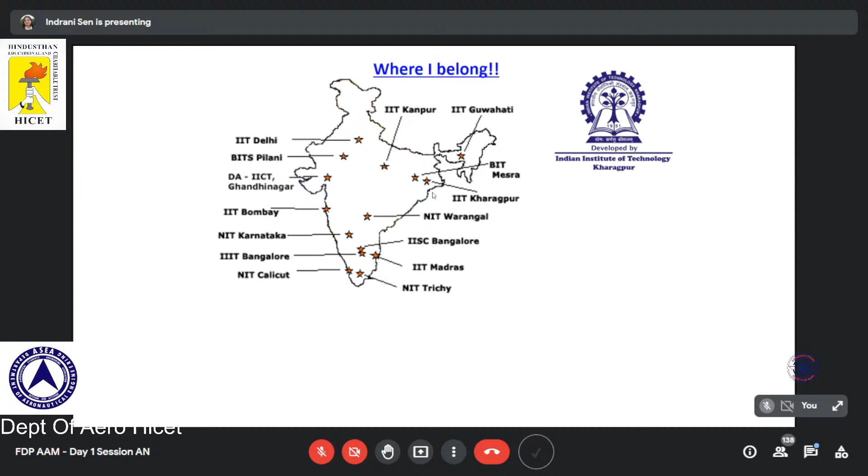So the title is a little bit more than just the shape memory alloy. It is microstructure and property correlation of nickel titanium based shape memory alloy. Before I start, let me give a brief overview of where I come from. This place is in the eastern part of this country, and this is the first ever IIT made in our country, established in 1951 by the first Prime Minister of India, Pandit Jawaharlal Nehru. We still have the old building here.

This is the old building with IIT inscribed on it, and this is actually in the land of Hijli, where we had the Hijli detention camp for the freedom fighters. There are jails inside the campus, and this jail as well as this building itself is now a part of the museum. We take great pride in converting a land of such great personalities into a land of knowledge. This is our present building. Many of you might have seen or visited this. This is the main academic building of our institute.

And this is my group, very recently taken, where one of my students has graduated, and he is joining as an assistant professor at IIT BHU today itself. This is my group logo. We mostly work on microstructure and mechanical properties, so broadly it can be termed a microstructure mechanical property correlations group, and we work on both conventionally processed as well as additively manufactured materials. And we do the studies at all length scales.

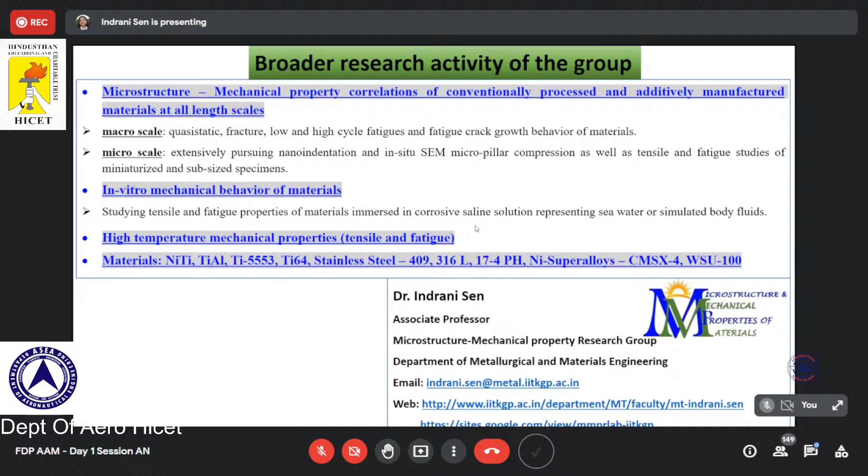At the macro scale, we study quasi-static tensile, compression, fracture, and all different kinds of fatigue behavior of materials. At the micro and nano scale, we do nanoindentation very extensively and some small scale mechanical testing also. Since we work on shape memory alloy, and one of the niche application areas of this material is as a biomaterial, we also study the in vitro mechanical behavior of this and other materials. We study the tensile and fatigue properties while the specimen is immersed in a human body-like environment.

This is also important when we are talking about marine applications. So we need to figure out what would be the performance when it is in a saline atmosphere. We also try to find out the high temperature properties, tensile and fatigue properties, and this is particularly relevant for titanium-based alloys which are used for aerospace application.

We do work on different kinds of material. Major work is going on nickel titanium. Other than that, we also have research activities focusing on different categories of titanium alloys. And then, of course, stainless steel forms the main backbone of metallurgy. So we also do work on several grades of stainless steel, both conventionally processed and additively manufactured, as well as different categories of nickel-based superalloy.

So in today's presentation, we will be focusing mostly on the mechanical and functional behavior of nickel titanium-based shape memory alloy, particularly in the submicron scale. Okay, so with this basic overview of my group activities, let's move on to the material.

Now, this is a very fascinating material, and let me just start the presentation with this note that this is the first day of this FDP program, and you are attending this program from different places. You are going to listen to many of the talks, which I'm sure will be very informative and will be used in your area of research or academic activities. So you are going to remember the major takeaway from this program, right?

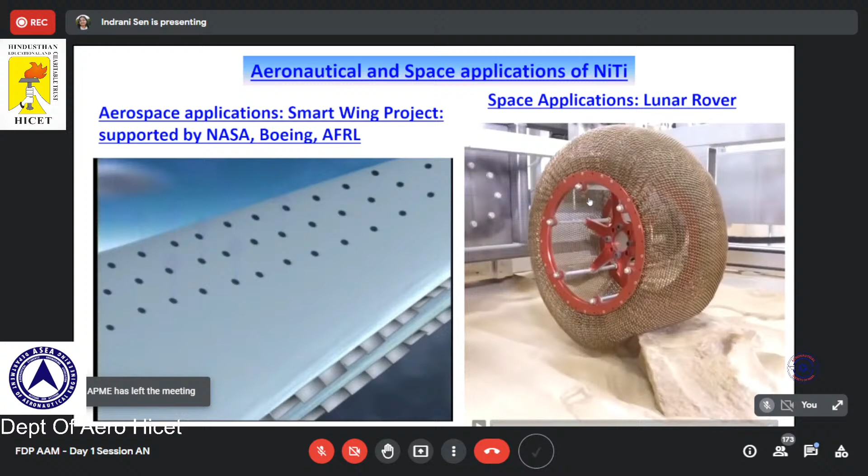Ma'am, can you just play the video? I guess the audio is still not coming. I can do one thing. I can unshare and then share one more time. Is that okay? No, it's not audible, ma'am. Yeah, it's not audible. So let me just unshare this and try to figure out if I can share the sound as well. I think instead of sharing a particular tab or window, if you share the entire screen, you will be able to play the audio.

Okay, now this one here on the right side is another very interesting application of nickel titanium. This is used in the lunar rover, the vehicle that is used on the moon. You know, the moon has a very rough terrain, and for that, again, NASA has made a wheel made of a mesh of nickel titanium. And you can see how it can overcome any hurdles that come in its way, and still there is no damage on the wheel frame.

So you can see that it can easily pass through different kinds of terrain. It is made of nickel titanium alloy, which can undergo a huge amount of deformation and yet come back to its original shape when it is removed from that rough terrain. So this is also known as super elastic. Earlier it used an aluminium wheel, and significant damage was noted in the wheels. It was made in the 1960s, and that could not hold much weight.

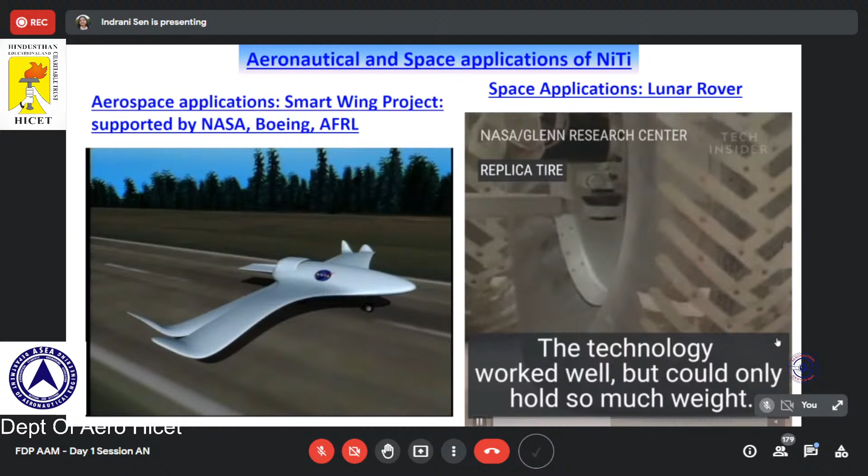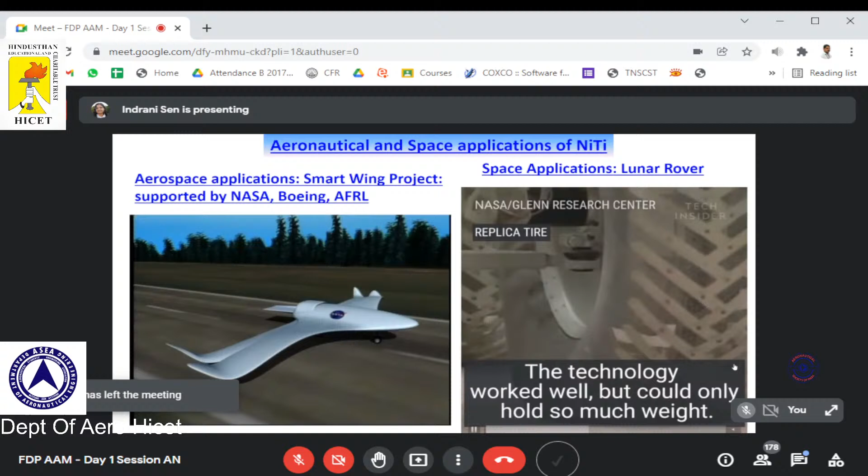So there was further development, and then it was used in the Curiosity Mars rover. But significant damage was incurred on those wheels. You can see the wheel structure there, completely different from the present one. So now this one is the latest design of the lunar rover wheel that has the ability to move smoothly on any kind of terrain, however rough it is. This will be used 2 years from now in the Mars mission. Okay, so various ambitious activities are going on.

So you have seen the extreme usage of nickel titanium for very niche and high-end applications. Now let's see where else this can be used. Not only nickel titanium, shape memory alloys and polymers are also very much used in the field of textiles. This is used not only in armor jackets, but several other kinds of cloth materials. And you can see this as an example.

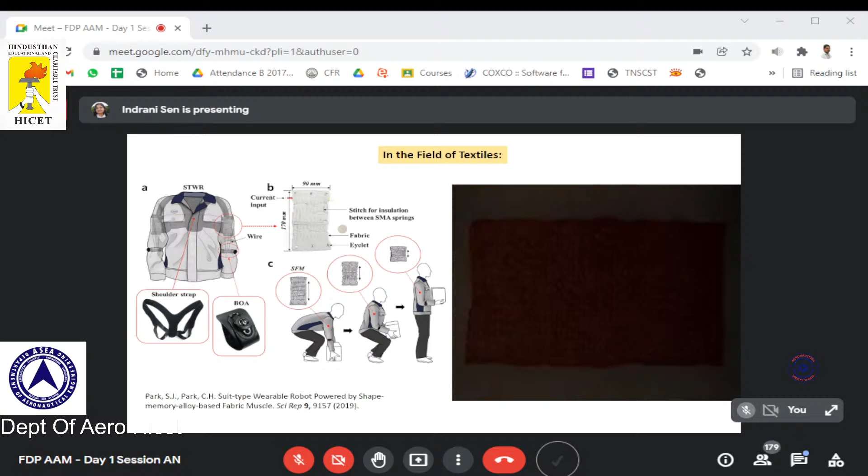This is a cloth made of a shape memory alloy fabric, and this can automatically squeeze or expand depending on the temperature. They can automatically roll up if the temperature is changed. So this is very fascinating and can be used in different kinds of applications. It looks like magic.

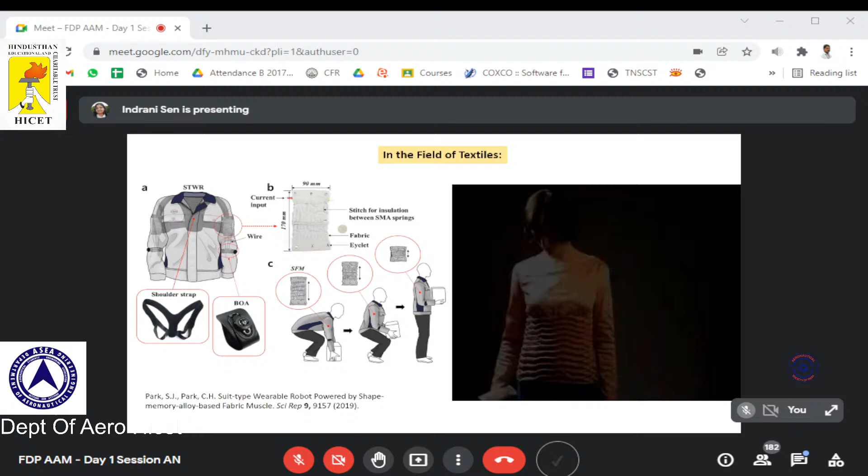Okay, so just by spraying the warm air, it is possible to squeeze the cloth. Okay, so then the obvious question that comes to anybody's mind is why, how, right? So how can this material remember its shape? And to answer this question, I should also emphasize something called phase transformation, which once again many of you will be aware of.

But for those who are not very familiar with phase transformation, this means how the crystal lattice is being changed. Okay, so initially this material is made of a structure which has some kind of lattice arrangement like this. In case of nickel titanium, the starting phase is called austenite, and this austenite phase has a cubic structure. You can see one of the atoms, let's say the nickel atom, is sitting at the body center, and the titanium atoms are sitting at the corners of the cube, and so on.

If we are reducing the temperature or applying stress, or both, then this crystal structure can change to a completely different one. Now this one is having a monoclinic structure. Same nickel atoms and titanium atoms, the red and the blue ones, are rearranged in a different kind of lattice, and this leads to all those magics that are coming into place. So the cubic structure can change to a monoclinic one, and that leads to all the differences in the properties.

So this video once again shows how nickel titanium, or shape memory alloy in general, works, and how the shape memory alloy structure can be formed. But unfortunately, if the sound is not audible, I will try to explain this as much as I can. Okay, this is not audible, right? So let me mute it.

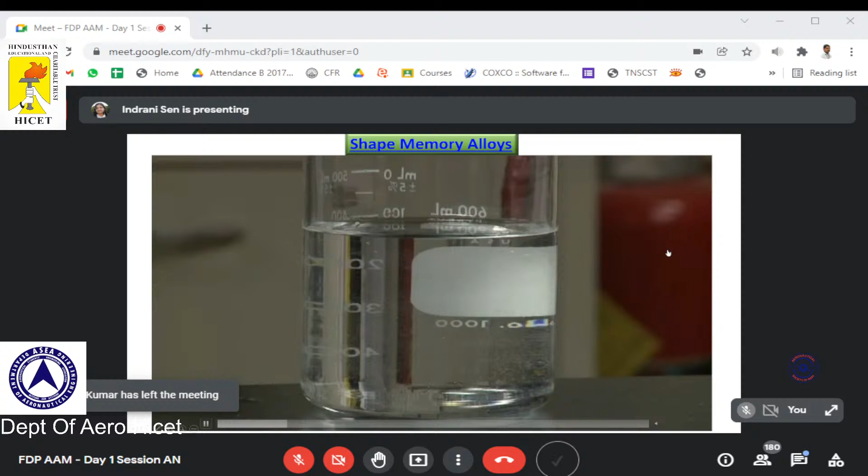So this is warm water, and whenever a wire is placed in that warm water, it gains its particular shape that has already been set to it. So you see, these are the different phases. This one is ice, and this is water, and then the boiling one, you know about the vapor. So these are the three different phases of water. So similarly, for nickel titanium also, as I have shown, there are two different phases, austenite and martensite. And all this is by the placement of the atoms into certain crystal structures.

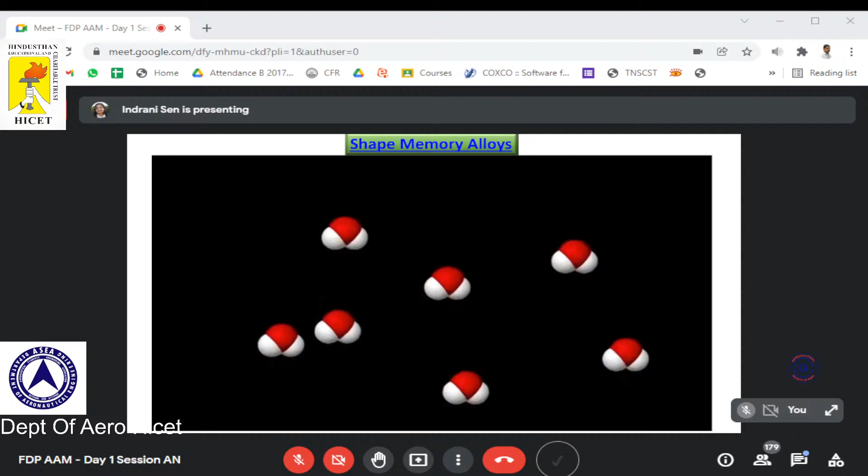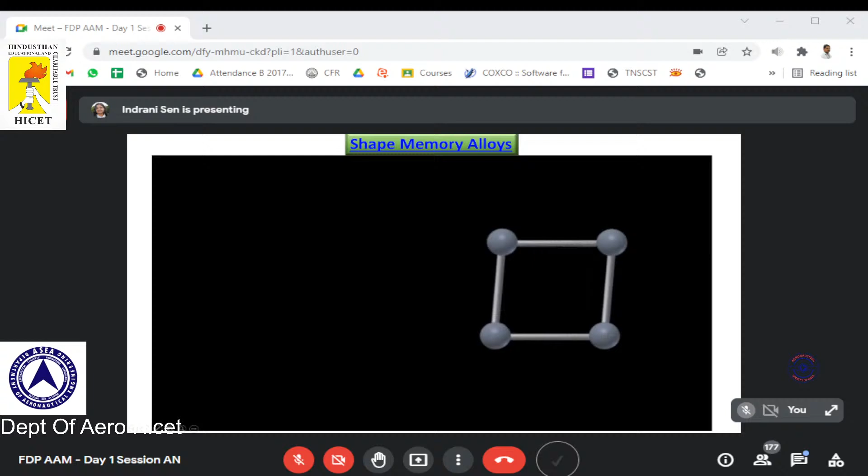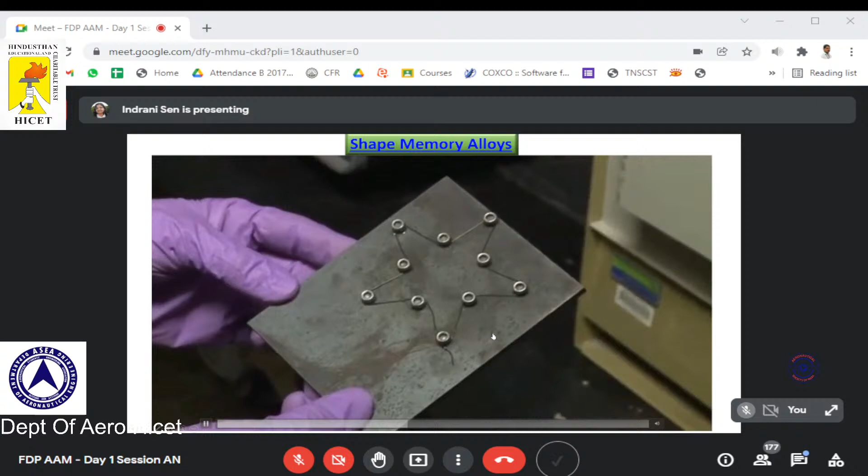So in case of ice, there is a hexagonal one at very low temperature. So in case of shape memory alloy, this low temperature phase is martensite, and at high temperature, it automatically changes to this cubic structure. And how to set the memory shape? You can see how the wire is being plugged into the screws. So a particular shape is being given, and then we need to heat it to a certain temperature at which it is fully austenite.

Okay, so at high temperature, this structure is having an austenite shape, and it is able to remember that shape. And when we are cooling it or quenching it in water, it changes to martensite phase. Now when it is at room temperature, if we are changing the shape, it is in the martensite, and whatever is happening to its lattice, it will come back to the austenite once it gains the temperature back. So as soon as we give it high temperature, the martensite structure has changed to austenite, and it has regained its shape. So different kinds of predetermined shapes can be obtained just by changing the temperature.

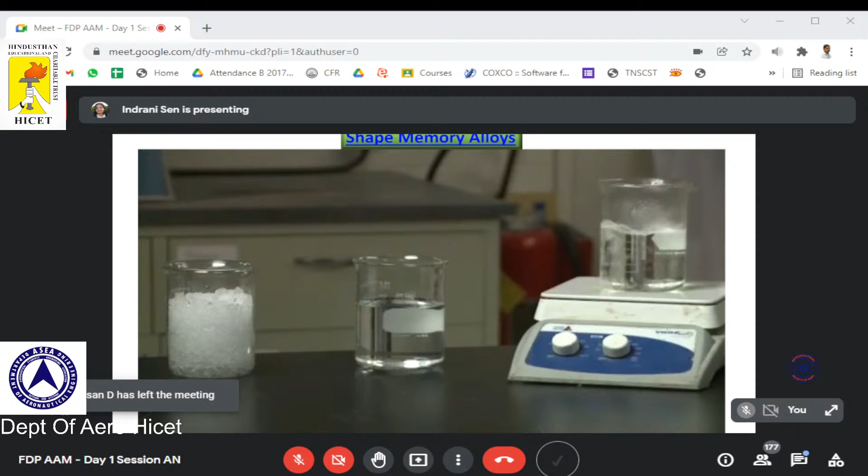This is how we would like to look into the more details of any kind of deformation or changes that are happening. We would like to look into the atomic changes that are responsible for such differences in the properties.

Now, shape memory alloy is not only showing such changes in shape, as you have seen when we put it in warm water and get a particularly pre-designed shape. It is not only restricted to that.

Rather, we can have a two-way shape memory effect, which means we can have two different shapes set in this material. In the austenite phase, we set one particular shape, and in the martensite phase we set another shape. Then just by changing the temperature or applying stress, it can go back and forth between the two different shapes.

So obviously this is used for several applications where we can make use of the two different shapes of this material.

You can see that this one is the cold one, this one is the hot one, and the spring has a particular length in the cold and the hot state, and it automatically goes to that kind of configuration whenever we are changing just the temperature.

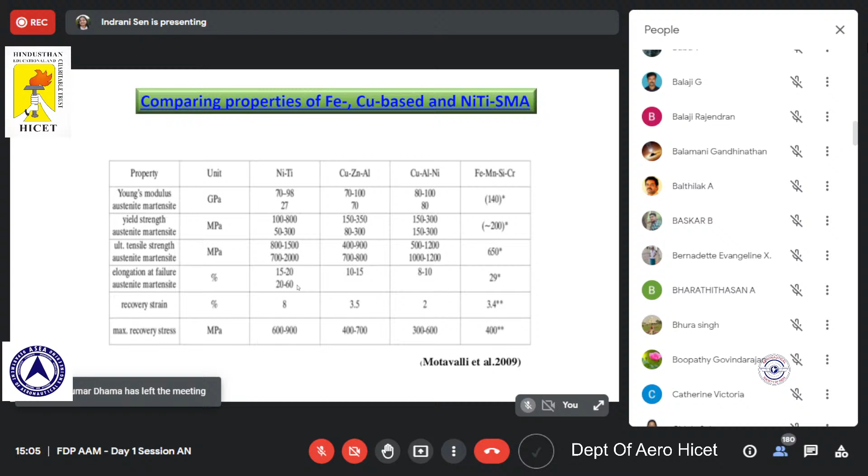Apart from that, strength and elongation are also quite high for nickel titanium, quite optimum values that we can obtain, and that is one of the reasons nickel titanium has gained popularity over other shape memory alloys.

If we talk about the temperature range over which it can be used, nickel titanium is typically used from around minus 50 degree to plus 100 degrees centigrade, quite a good span of temperature for regular usage.

If we want to use it at a higher temperature range, we can make a ternary nickel titanium alloy with the addition of hafnium, zirconium, or platinum, and achieve a temperature as high as 300. Overall, we can achieve a range starting from minus 50 to plus 300 or 350, quite a high range of temperature.

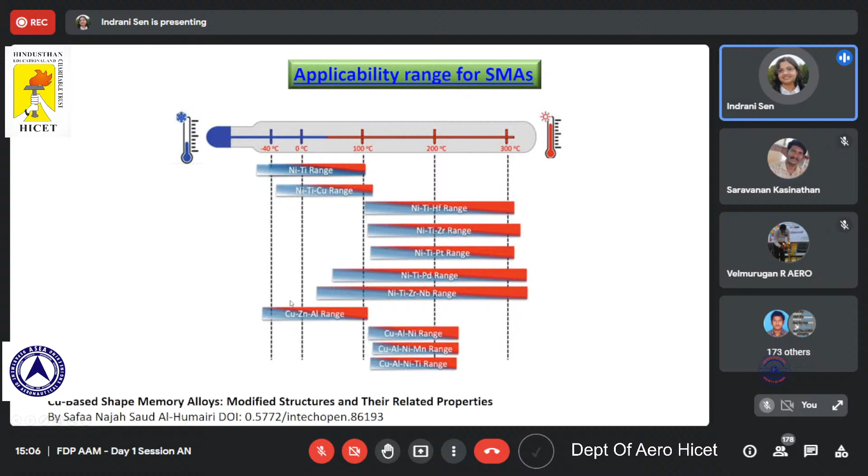On the other hand, copper-based alloys are mostly high temperature, and we cannot use them for low temperature or room temperature applications. All this has made nickel titanium very important, showing the importance of this temperature range.

This material at high temperature behaves like a regular material, like any other metallic system, an elastic-plastic one. At intermediate temperature, it has a pseudoelastic effect, and at low temperature, it shows the shape memory effect.

All these occur because of the phase transformation this material undergoes as temperature changes. Even without applying any stress, just by changing temperature, the phases change, leading to different properties and characteristics. At high temperature we see the pseudoelastic effect, while at comparatively low temperature we see the shape memory effect to be active.

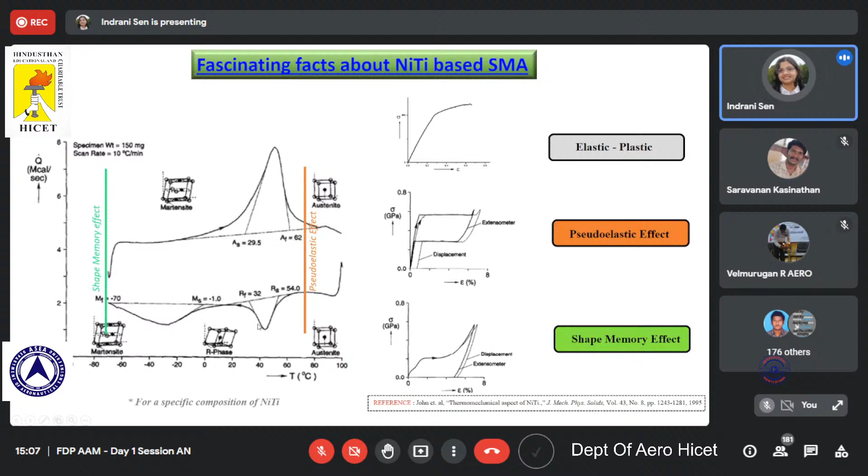So these are the principal advantages of choosing nickel titanium over other shape memory alloys: it has a temperature of applicability around minus 50 to 110 degrees centigrade, good strength, and high elastic modulus in the austenite phase, but in the martensite phase it matches the human bone.

Along with that, this material is biocompatible and has good corrosion resistance, making this alloy very suitable for biomedical application. It also has very high damping capacity because of this recoverability, and as a result it is used in earthquake-prone structures, bridges, and flyovers, where damping is one of the main factors.

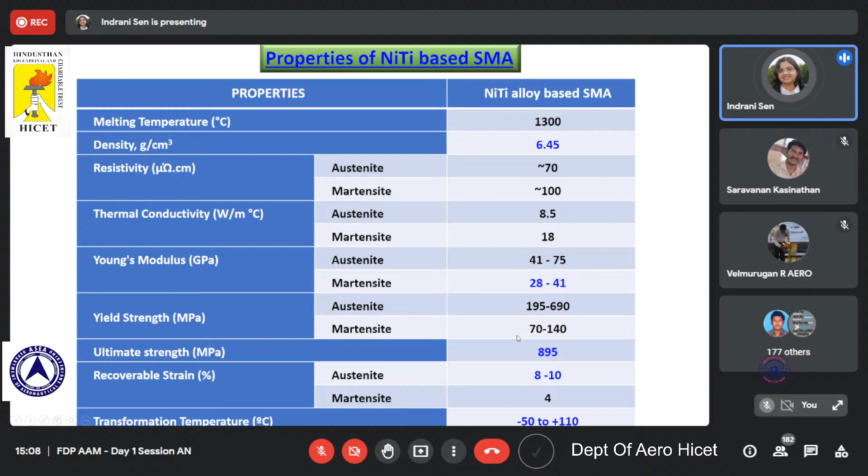So this once again is the overall properties of nickel titanium. I'm not going through the details again since we've already talked about this.

Before we go into the nitty-gritties of nickel titanium and the explanations, I would like to give a hint of the different terminologies used in the shape memory alloy business. You must have heard terms like shape memory alloy, often known as SMAs. This material is also known as memory metal because it can remember its shape, or smart metal, and Nitinol, as I said, is a very common name for nickel titanium.

There is shape memory effect, as you've seen in the video, related to both temperature change and stress change. There could be just one-way shape memory effect or even two-way shape memory effect, where it can remember two different shapes. On the other hand, it also has pseudo-elastic effect, also known as super elastic effect, where it can recover strain up to as high as 8 to 10%.

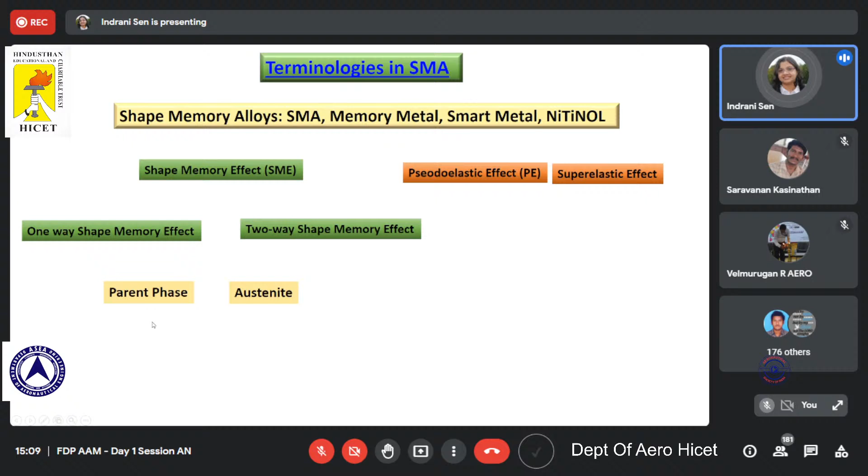All these kinds of effects, shape memory or pseudo-elastic, are related to phase transformation. In any phase transformation there is a parent phase, which is austenite, and a product or daughter phase, which is martensite, or R phase, another intermediate phase. Then there is twin, detwin, or reorientation, which happens particularly in martensite structures.

The phase transformation from austenite to martensite, or parent to product, occurs along certain pairs, certain variants, called correspondent variant pairs and habit plane. I will explain this in a bit. All this phase transformation is not happening arbitrarily; there is a theory behind it. There is a stress-induced martensitic transformation, and there is a phenomenological theory of this kind of transformation.

So these are the words, the jargons that are very much used in the shape memory alloy business. And I thought I would share this with you.

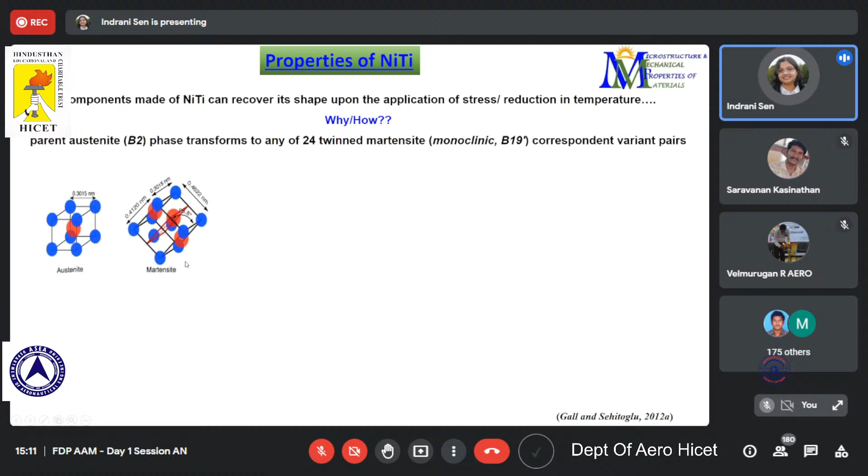Okay, now coming to the real picture, how this is happening. We have seen this earlier also. So there is an austenite structure, there is a martensite structure which converts from austenite to martensite. So far so good. But how is this conversion happening?

If we have different grains, like in polycrystalline materials, this transformation can happen through different CVPs for different grains. That is also possible. But whatever it is, one set of transformation from one austenite single crystal to another martensite single crystal can happen along one out of 24 different CVPs.

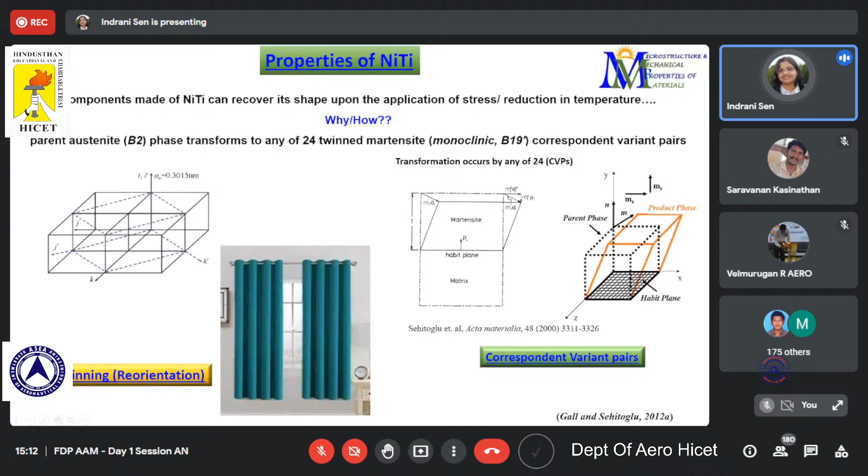Similarly for the martensite twins also, if we are applying stress, it detwins, or this is also known as reorientation.

Now what happens when we are simply applying stress is that initially there is an austenite structure, a cubic one, and when we are applying stress, this is a typical stress strain curve that you're familiar with. When we apply stress at a particular amount known as the martensite start stress, this austenite structure starts converting to martensite.

By the end of this level, this can be either flat or with a very little slope. This martensite conversion is complete, and detwinning has also happened. You can see that initially this is twin structure and later on it is getting stretched.

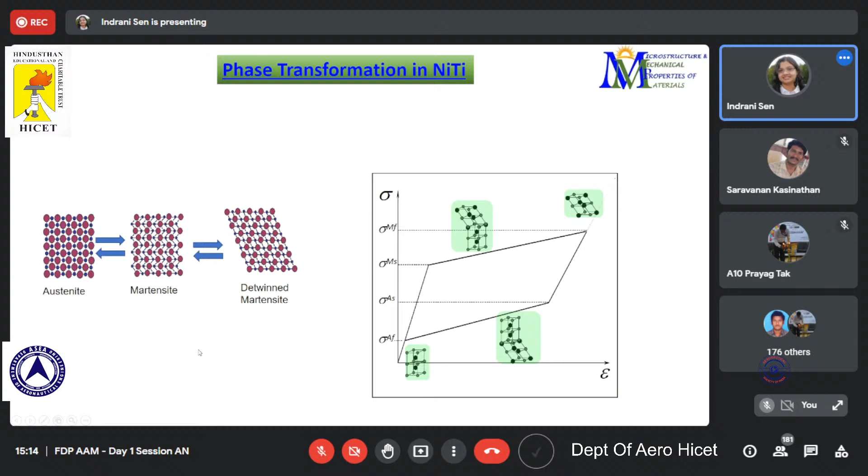Now the beauty is that up to this level, if we have applied the stress and it has attained a certain amount of strain, and now if we simply unload it, it comes back to the initial starting phase, that is the austenite phase, and this entire amount of strain gets recovered. That makes it an interesting system.

So this is how the stress strain curve looks like. You can see the elastic part like any other material, and then the pseudoelastic part and detwinning etc. If we unload it from here, it will come back to the austenite phase, but if we keep on adding stress, it will behave like a regular material, like typical elastic plastic deformation, and it will fracture at a certain point.

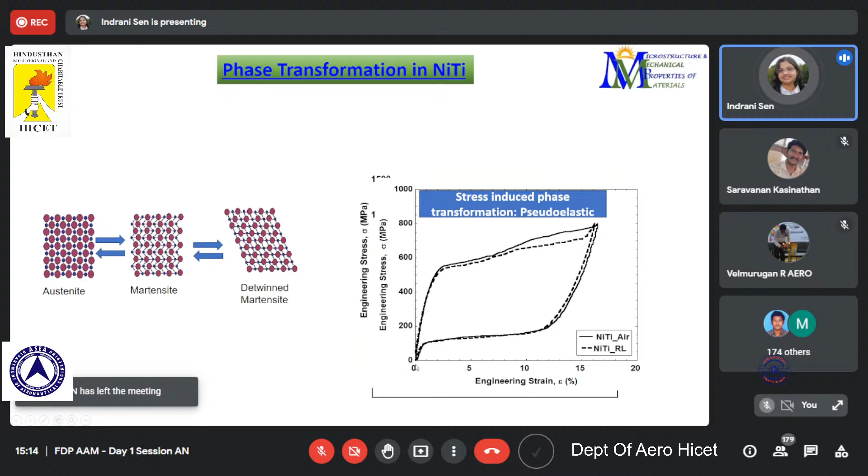Whereas if we are unloading it within this plateau region, known as the pseudoelastic plateau, it can regain its shape completely. This is the experimental result that we have seen in our group.

Now all of this has been done without the application of temperature, keeping the temperature constant, under isothermal condition. Now there can be another situation when we are not making any change to the stress level, but the temperature is being changed. Initially the alloy at higher temperature is austenite, and when we cool this, there is a phase transformation happening, starting at the martensite start temperature, finish temperature, etc.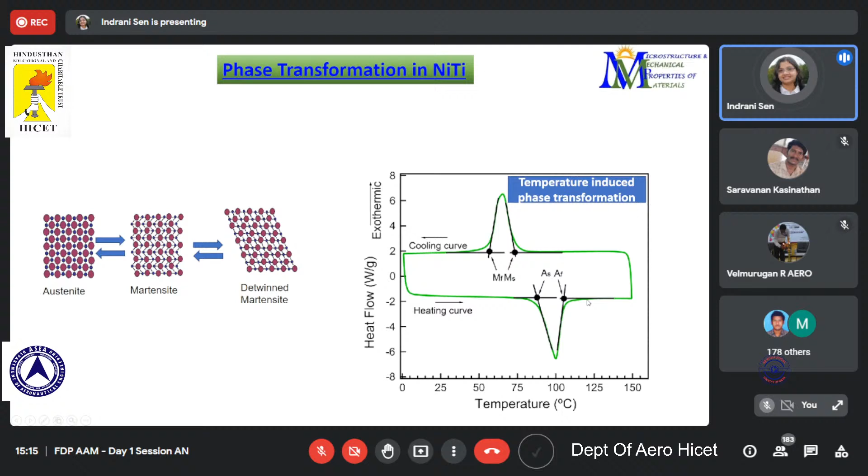Now pseudoelasticity is our main topic of concern for today's presentation. We'll be talking about how this material behaves and what are the differences in the pseudoelasticity if we play around with the material composition, the making of the material, processing conditions, etc. So this is how the pseudoelastic thing looks like.

We have an initial structure, as you have seen, made of austenite, and then if we are applying stress, it extends or attains a different kind of shape, and then when we are releasing the stress, it comes back to the original austenite form once again, as seen from the bottom image here. Okay, same thing is being explained here with the atomic changes.

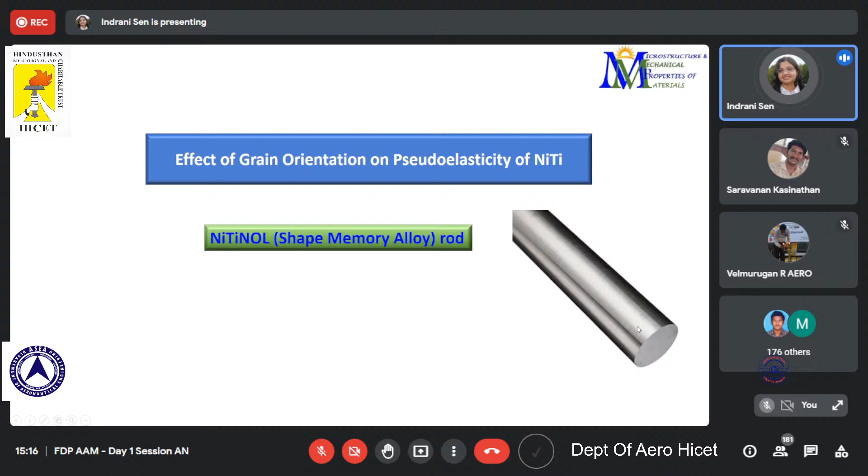Now, let's come to some of the experimental results. So what we have seen in this study is very interesting. So we have a nickel titanium rod, something like this, of around 10 millimeter diameter, okay? And it shows very good elasticity in tensile sample as per the standard. And then when we have tested this, you can see that this one is the compressive stress strain diagram, but you can see that it can undergo the phase transformation, and once the load is removed, whatever strain that has been generated is completely recovered.

Okay, now we understand that this is the bulk properties of the material, but what happens internally is even more interesting. So what we did is, we did a detailed microstructure study at the first hand. So you can see here, this colorful image is nothing but an electron backscatter diffraction image. It's called IPF map, inverse pole figure map. You can see the grains of different orientations very clearly, and all these are nothing but the austenite grain structure. This is the crystal structure of austenite. Based on this, the different orientations, the different grains are being colored.

Okay, this is the TEM image, and you can see very nicely the grain boundary and the triple points here. The crystal structure of the austenite phase is confirmed through TEM. And we are all satisfied that this is a single phase material. This is also confirmed by the XRD, X-ray diffraction, which shows a single phase material with the austenite structure having B2 phase. This B2 is just the cubic phase, ordered cubic structure.

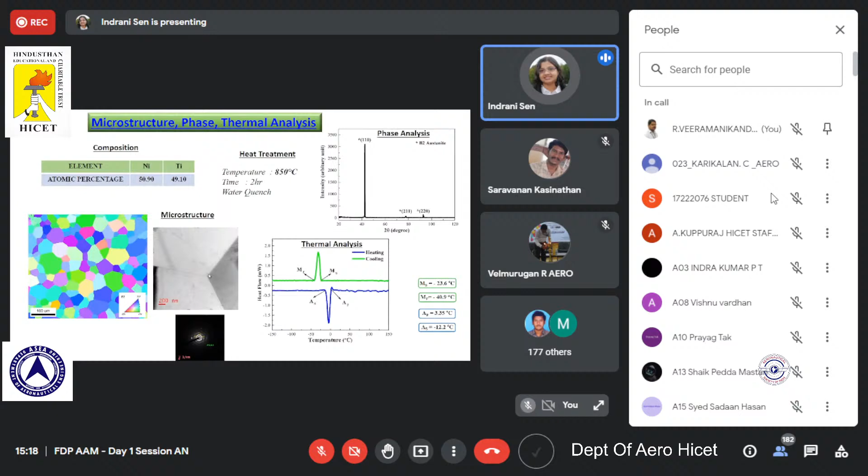Now, when we did the DSC, differential scanning calorimetry, we could figure out what are the martensite start and finish temperature and what are the austenite start and finish temperature. You can see that the martensite start temperature is minus 23 degrees centigrade. So that means that if we keep on cooling the alloy from room temperature or 150 degrees centigrade, at minus 23 degrees centigrade it starts converting to martensite. And when we cool it till minus 150, it is fully martensite.

And again, when we are heating it, it starts converting to austenite at around minus 12 and finishes at around 3 degrees centigrade. So that means that at room temperature, this material is fully austenite. Room temperature means 30 degrees centigrade. It is fully austenite somewhere here.

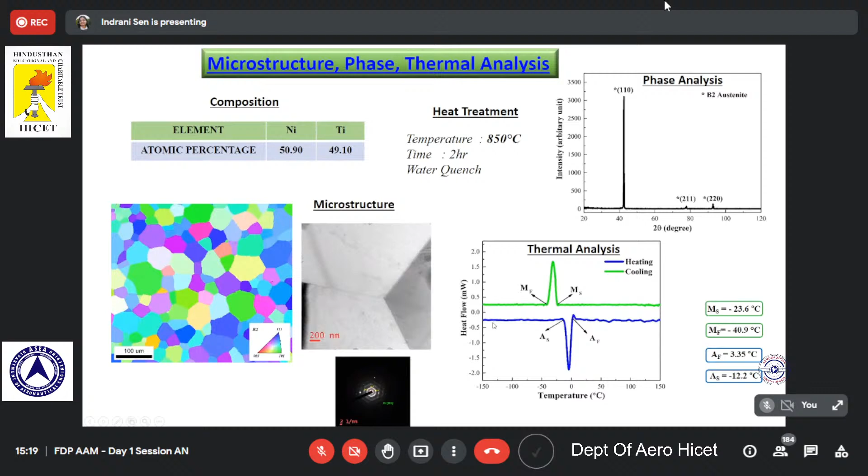Okay, fine. Now, what we try to do is find out the pseudo-elasticity of each of these grains. And how we do that, since the grains are very small, size of around 30-40 micrometer, we did indentation. Indentation, as you can see in this small video here, has a specimen surface and then it indents on it, it presses, and once it comes back, we get an impression of this indenter. Some part will be recovered and some part will be a permanent deformation.

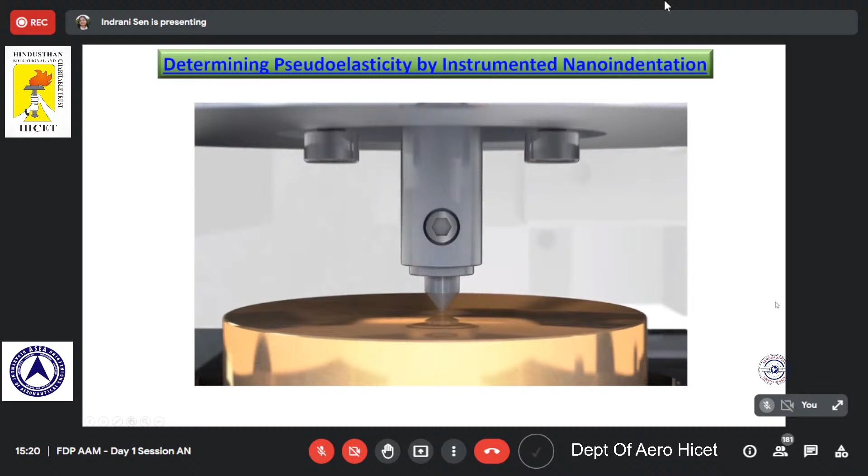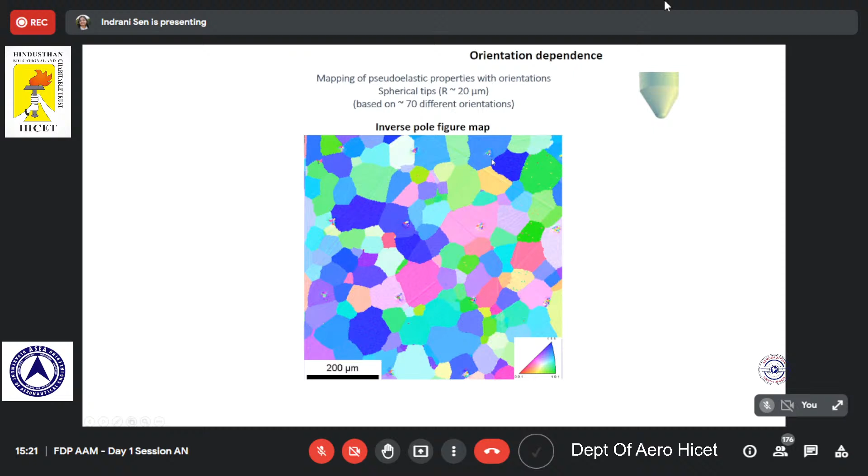So these are some of the examples shown schematically. Actually, the indents are very small and cannot be seen in any microstructure or microscopy very easily. So again, what we are going to get from here is something like this, the elastic and the pseudoelastic zone for the case of nickel titanium.

Okay, so this is the beauty of nickel titanium alloy, and to our surprise, what we found is that when we did this for all the different grains, you can see this is a stereographic triangle, and the colors here signify the color of the grain that we have seen in the EBSD map based on this orientation. So we have indented on several orientations, and we have found that the recoverability of these grains is different. These orientations are different.

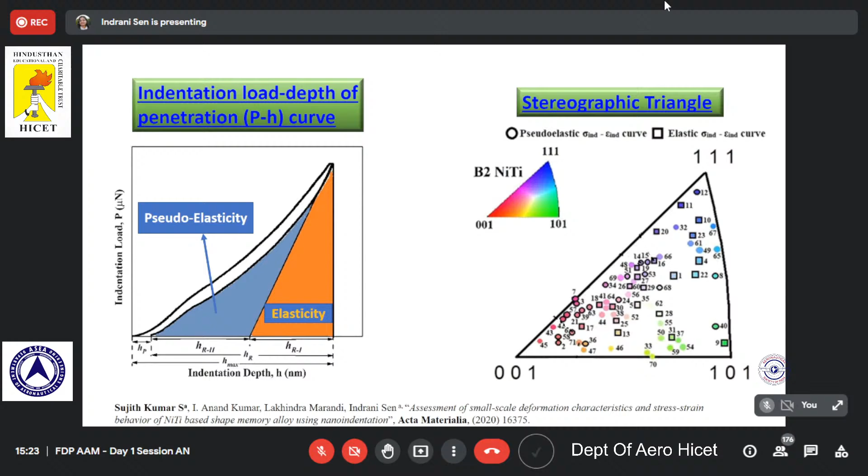The red one here is how it is supposed to be when it is completely elastic. And there is a huge amount of deviation when we are talking about this orientation, which deviates completely, and there is a significant amount of plastic deformation here, permanent deformation. This becomes more apparent if we are able to find out the stress versus strain curve.

You can see that it shows some kind of features similar to the pseudoelastic behavior. There is a plateau strain and there is some further deformation as well. But here there is a huge amount of strain that is not being recovered at all. So that means that the different orientations will behave differently. As I said, different orientations may also undergo the transformation based on different CVPs.

So this is very important if you are talking about fabricating a single crystal, let's say sensors. We would like it to have the best pseudoelasticity, and we cannot ensure that unless we know which one is actually supposed to give us the best pseudoelasticity and which orientation is not suitable for pseudoelastic recovery. So based on this kind of detailed study, we have done this on around 70 grain orientations to figure out which one is the easy orientation, that means which shows the best pseudoelasticity, and which one is the hard one.

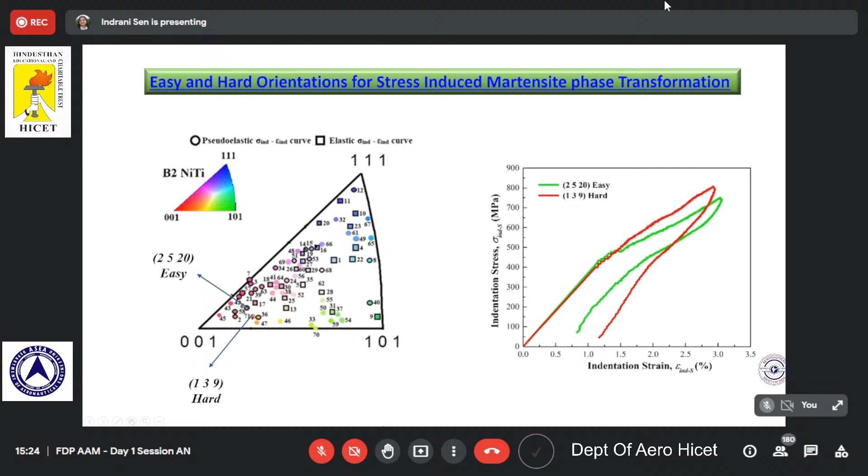So the take-home message from here is that grain orientations do influence the phase transformation characteristics and the pseudoelastic recovery. And if we are thinking of using it for a single crystal application, we should be careful about that.

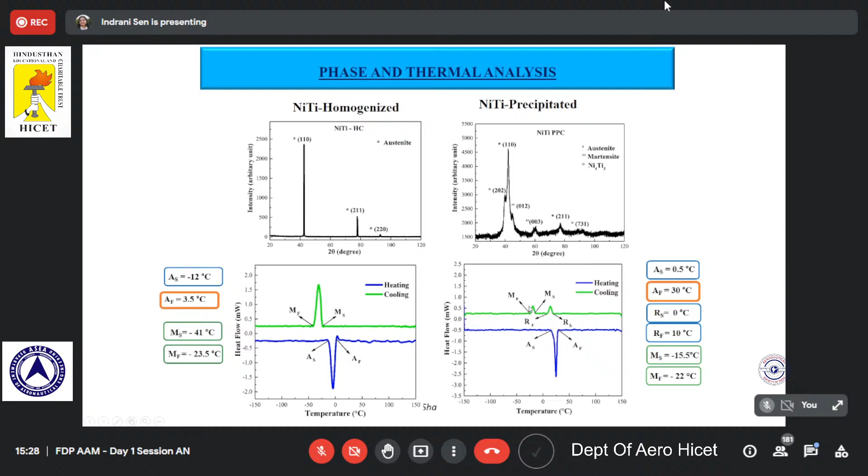So it's very close to the room temperature, or if we are considering room temperature as 300 K, actually it is exceeding the room temperature to a certain extent. So that also indicates the possibility of the presence of a little bit of martensite at room temperature. Also these double peaks do signify that there are precipitates present in the structure.

Now to figure out the pseudoelasticity, we used a smart way in which we, of course, did nano indentation, but we used two different kinds of indenter tip. In one case, this is the Berkovich indenter tip, very commonly used for nano indentation. If you want to use nano indentation, this is the most preferable indenter tip geometry. It gives a triangular shaped impression once we indent it on a material.

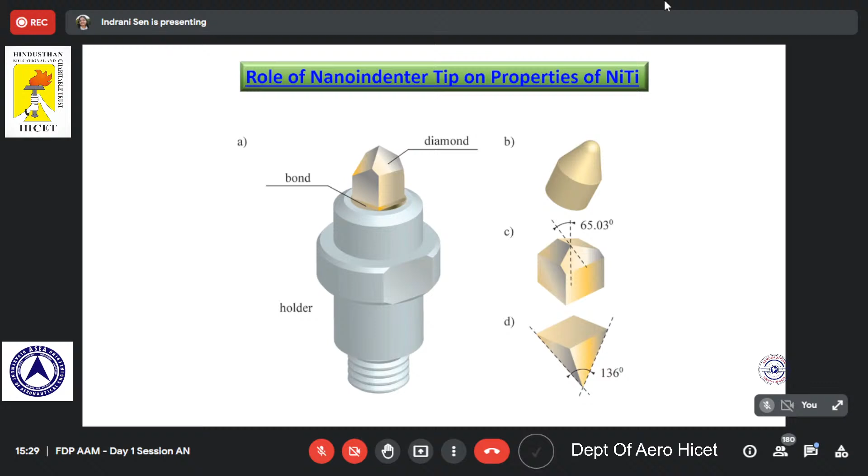Along with that, we have also taken a spherical indenter tip, which, as you can see, is quite blunt. Why we used two different kinds of indenter tip is to make sure that there is not a significant amount of plastic deformation. We can still impose a very low amount of plastic deformation to figure out any differences in the pseudoelastic recoverability, if there are, between the homogenized condition and the precipitated condition.

So same alloy content and everything, and we are not talking about the orientation; even on the same orientation, just if we are having the alloy aged, if there are precipitates forming in the structure, that can also influence the phase transformation behavior and the pseudoelastic recoverability. So the point is that if we want to achieve the best combination of properties, meaning the optimized condition, sometimes we have to rely more on the strength, sometimes more on the recoverability based on the application. We can play around with the microstructure, change the processing conditions, and achieve completely different kinds of properties that meet our requirement.

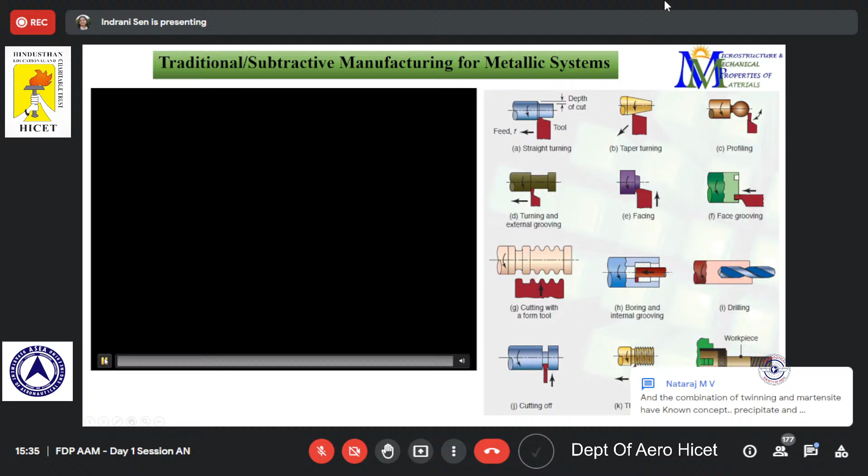So this is forming, when we give a particular shape directly. So the corner here will be chamfered. These are the chips that are coming out, and now you see there is a 45-degree angle that has been formed. This is grooving, where the grooves are being made, threading, etc. All different kinds of shapes that we need to provide. We use such kind of subtractive technique, or conventional technique, to make that.

So in short, this is how it is formed. We have a big block, and then we use subtractive manufacturing. Subtractive because material is continuously being removed. And finally, whatever structure we require, this is the shape which is given, and there is a huge amount of waste, almost a similar amount, sometimes even more than the actual object.

In contrast, additive manufacturing is a layer by layer addition which gives the final 3D shape. So we use only as much material as is required, and it is formed in the bottom up approach. That's why it is called additive, because each layer is added one upon another, and we finally get the same shape as this one. But in this case, you can see that there is very little wastage.

So obviously, additive manufacturing saves not only the material but also the cost. It is a green technology, good for the environment, and so on. And also, it is giving a complicated shape.

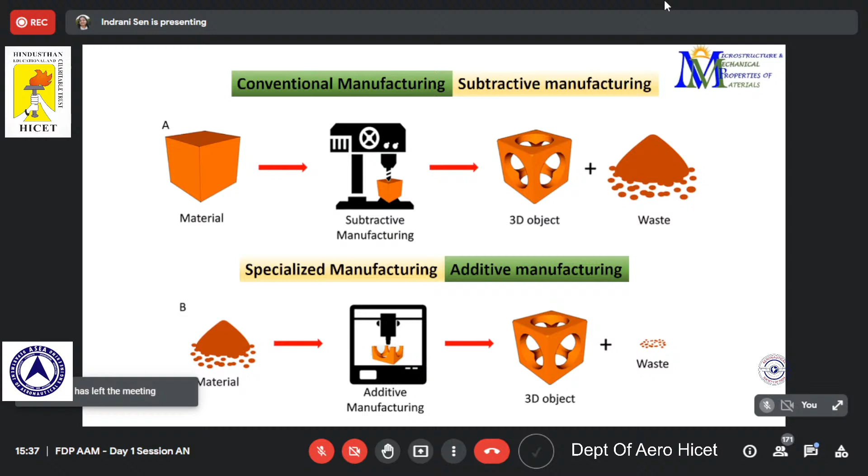Okay, getting distracted by some questions. Fine.

So these are the typical differences between additive and subtractive manufacturing. In additive manufacturing, material is added layer by layer to form a complex shape in just one step, and there is a possibility that some porosities may generate. But that can be controlled and monitored. There is a significantly reduced material wastage, as we have seen.

However, the only drawback of additive manufacturing is that it is still applied to a very limited number of materials, whereas subtractive manufacturing has been used for widely different kinds of materials for ages. In this case the material is removed from the solid block to give a complicated shape, and as a result it leads to a significant amount of material wastage, but it also generates differences in density or porosity, and it is a little bit difficult to control the porosity generation, right?

So you can take this as the advantage of additive manufacturing and the disadvantage of subtractive, conventional manufacturing, whereas the advantage of conventional manufacturing is that it is tested and trusted for many materials for decades, for ages, for centuries. Additive manufacturing is a growing technology, and a lot more needs to be known for applying it on a bigger scale.

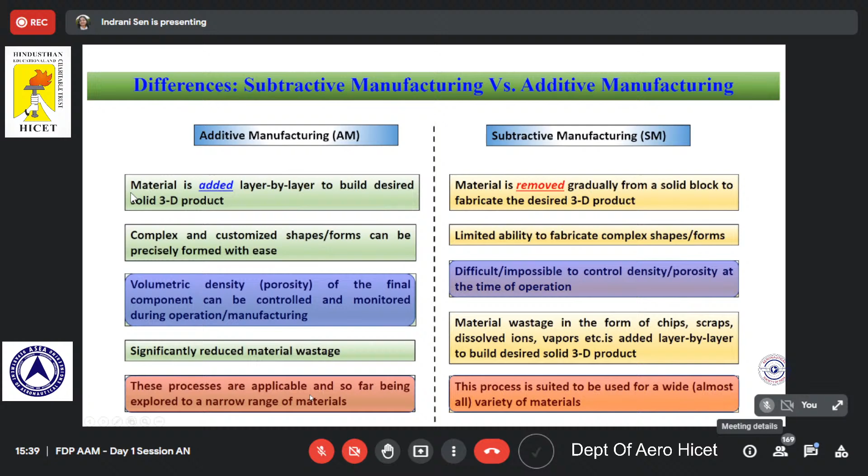So these are some examples of additive manufacturing processes that are used for different metals, different materials. For metals particularly, we use either of these techniques, powder bed fusion or powder feed technique. Okay, and there are again different categories of powder bed fusion, where the powders are

okay, thank you. So in case of powder bed fusion, the powder is spread in a bed, and then, based on the particular shape and dimension, laser is acted upon that to give it a typical complex shape that we require. And in powder feed, the powder and the laser source are acting simultaneously to give the particular shape as per the CAD, computer aided design.

Okay, so there are different kinds of techniques like EBM, DMLS, SLM, which are very famous for powder bed. And in case of powder feed, there is laser engineered net shaping known as LENS, direct metal deposition, laser metal deposition. These are some of the very popular techniques. And in today's presentation, we are going to talk about the LENS, laser engineered net shaping process. Okay, so let's see how this kind of process works.

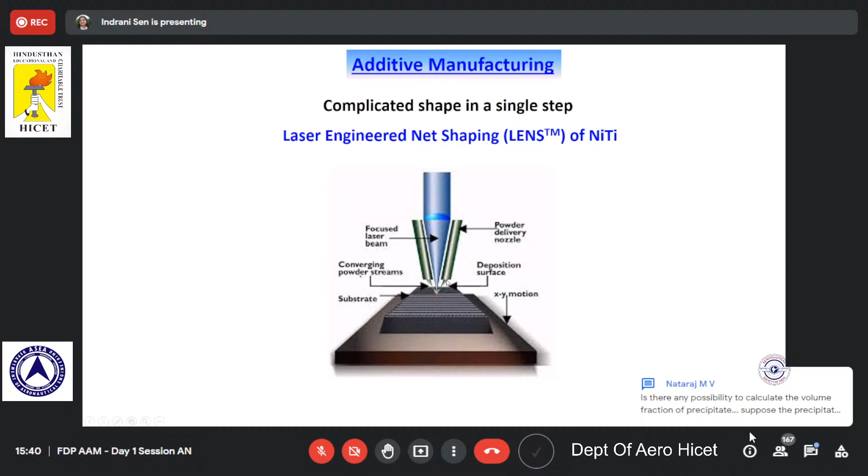So what happens here is that powder is inserted through one of these nozzles. Sometimes there are two powder feeders also, and in this case there are two powder feeders, this green one, and then there is a laser beam, both the powders and the laser acting simultaneously, and this can move based on the CAD design, and that can lead to a final shape. So you see here a video which shows how this works.

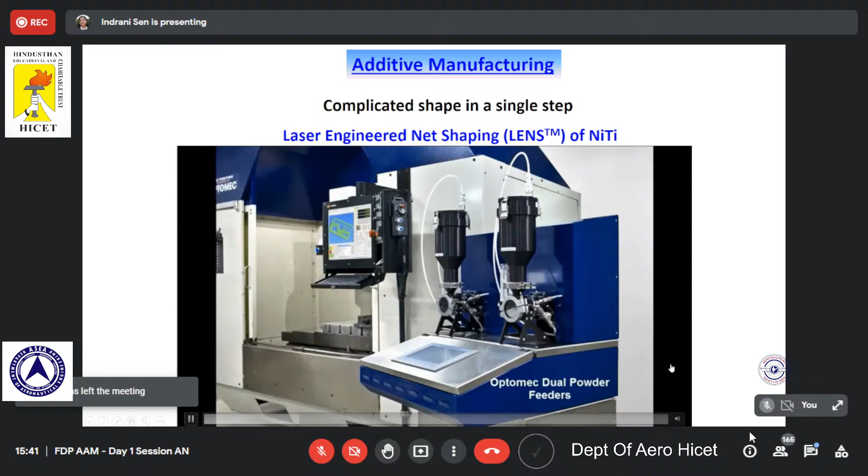So you can see that there are these dual powder feeders. Here is the laser tip. Okay, so you can see now these are the parameters set on the machine. Laser is being turned on. And this is how it is being formed.

You can see the powder feeders and then the laser, and this is moving, scanning as per the design. Okay, so it's moving in this direction, and in the next layer you will see that it is actually moving in a perpendicular direction. Okay, so now you see it has changed its direction of moving to a perpendicular one.

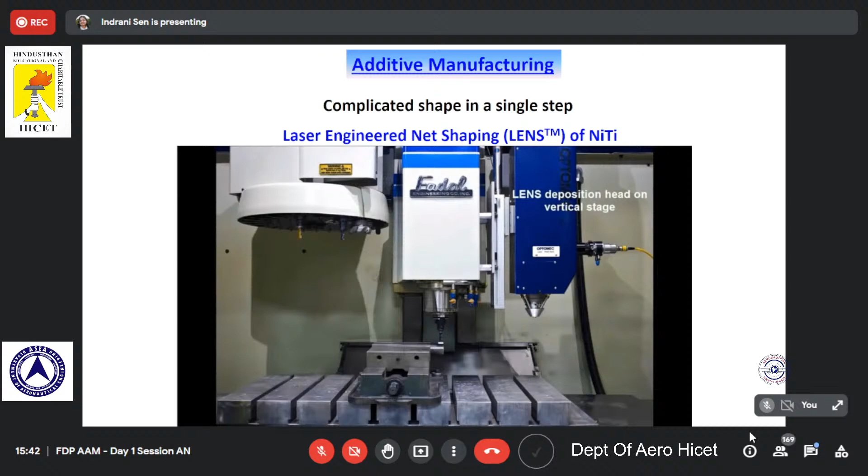Okay, so every layer it can alternate its direction of motion, and this can be set to 90 degree or 45 degree, 60 degree based on the requirement. That is to maintain some uniformity in the structure so that it is not getting textured. And once formed, it is removed, and then the substrate has to be removed. Okay, so this is a machine placed in the Central Glass and Ceramic Research Institute, which has been used here. So all the operations are done inside the glove box.

Okay, now when we made 3 coupons of nickel titanium, what we did is we varied the parameters of the additive manufacturing here. So we played around with the power and the scanning speed, and we ended up having 3 different laser energy densities. Okay, the lowest laser energy density is 27 joule per millimeter square, and the highest one is more than 2 times of this, which is 70 joule per millimeter square.

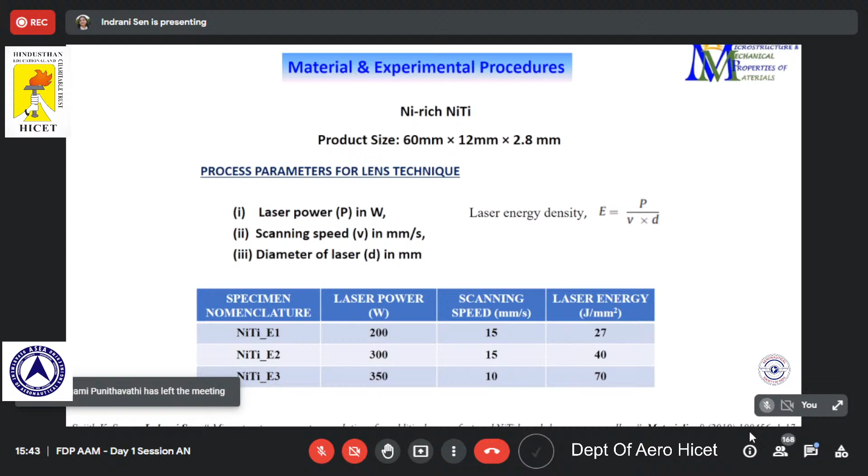So the starting powder is the same, but we just used 3 different energy parameters, and as a result we ended up getting 3 coupons which look alike. We all know that it started with the same material, so it's supposed to behave the same also. But what we have seen is interesting. So this is the coupon that we have formed.

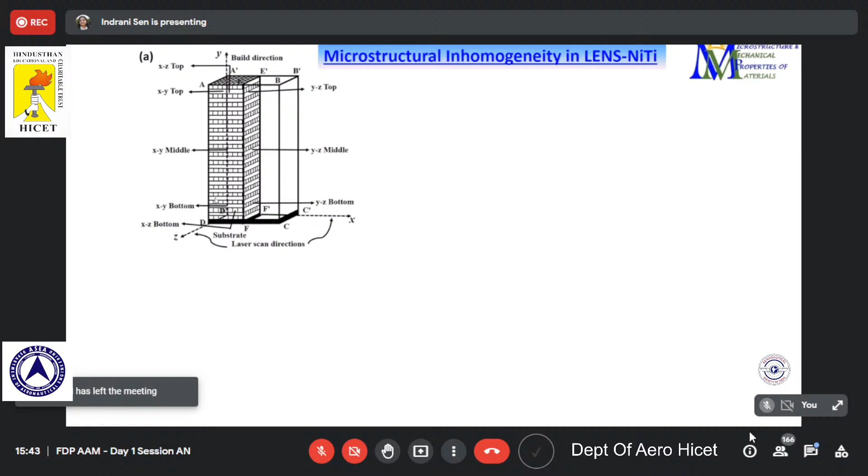This is a schematic of that, and you can see that this is a schematic of the layer by layer structures formed. And since this and the subsequent layers are in the alternate direction, this looks blank, but if you go perpendicular to that, you can see the opposite patterns here. Okay, now it's a complicated microstructure that it is supposed to form because of this layer by layer addition.

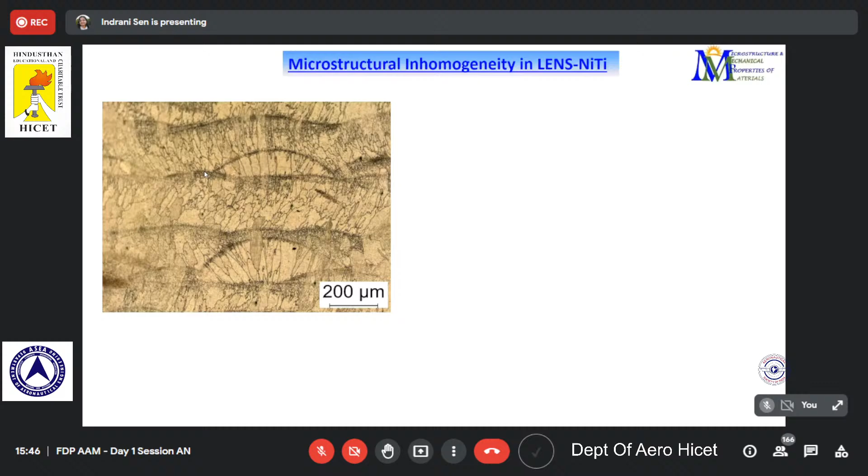So we have estimated the size for each of these, and you can see that while the columnar and the equiaxed grains are as big as 25 to 30 micron, the fine equiaxed are only 4 micron. So there is a huge non-uniformity in the structure. And interestingly, this non-uniformity is also getting reduced as we change the laser energy density.

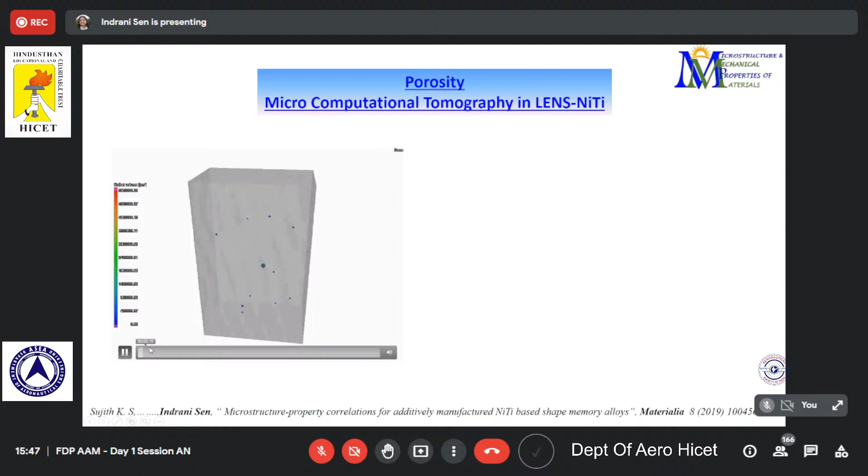What we did next is, for these coupons, we have done micro computational tomography. So it shows the porosity, the presence of porosity in a 3-dimensional way. Okay, so you can see how the porosities are distributed throughout the structure, throughout the coupon, and you can see that...

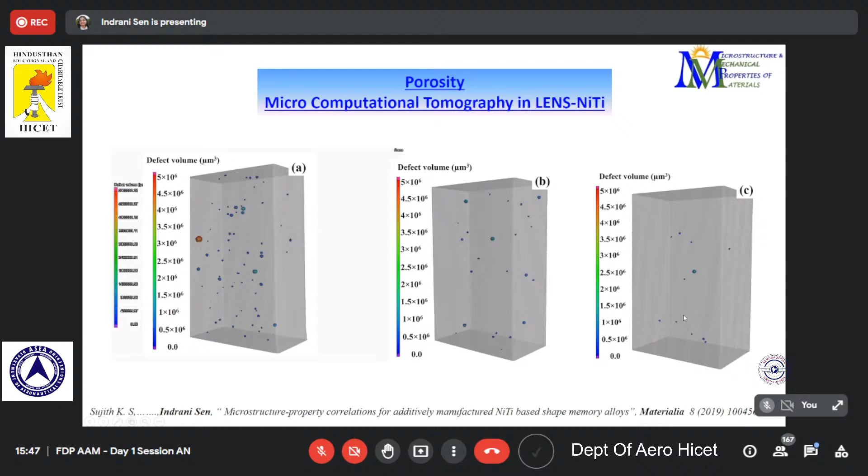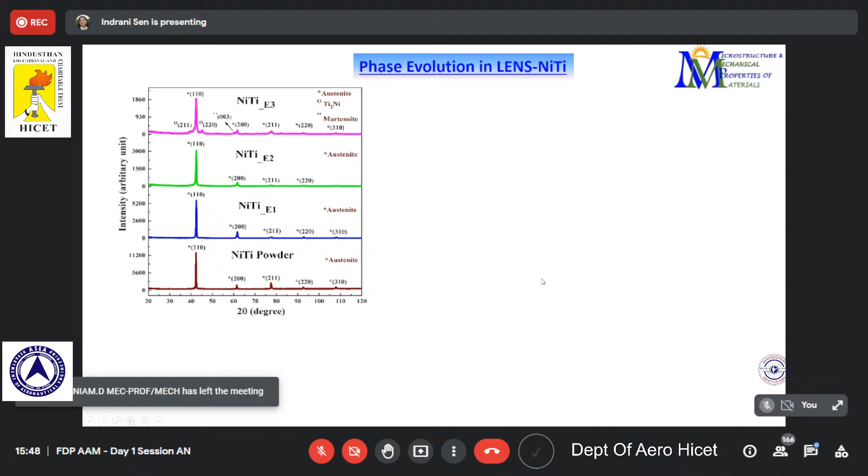Okay, in the XRD, we have done the analysis for the starting powder as well as all three LENS-manufactured alloys, and we can see that the one manufactured with the highest energy, as seen from the TEM, also shows presence of precipitates and martensite phase, and this is reflected in their DSC pattern, their phase transformation temperatures as well.

So the one prepared with the highest energy density shows a very high austenite finish temperature, which indicates that at room temperature it is having martensite phase.

Okay, now this is supposed to affect its mechanical properties as well, and we started with indentations first, performing them at different levels. At macro indentation, when we used a quite higher load of 500 Newton, you can see that it has almost similar values of hardness for all three conditions.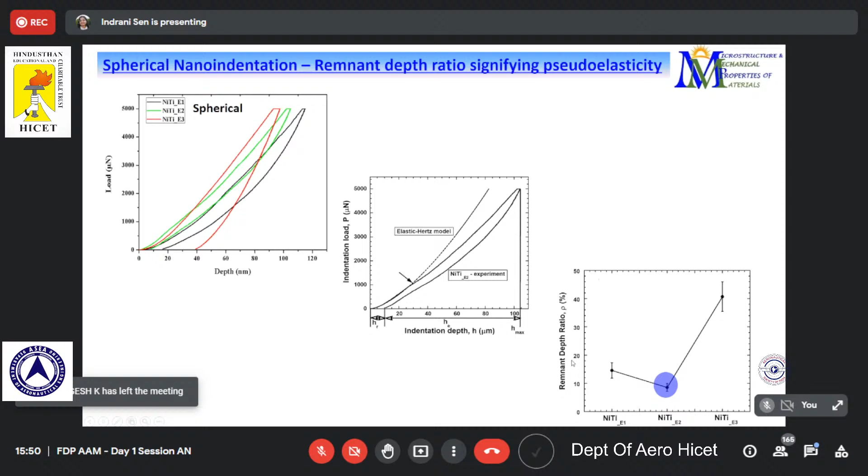This one shows around 90% recoverability, as you can see with the green colored curve—a very good amount of recoverability. To check that, we plotted the stress strain curve for these three alloys. The one, E3, prepared with the highest energy density, due to the presence of martensite and precipitates, restricts recoverability, causing a huge amount of plastic deformation. The alloy prepared with optimum laser energy density in the middle shows a perfect pseudoelastic plateau.

To find this out completely, we did the macroscopic tensile test, the regular conventional standard tensile test. You can see that the one with optimized laser energy density actually gives the highest deformation, and we can figure out the pseudoelastic plateau also very clearly from this structure.

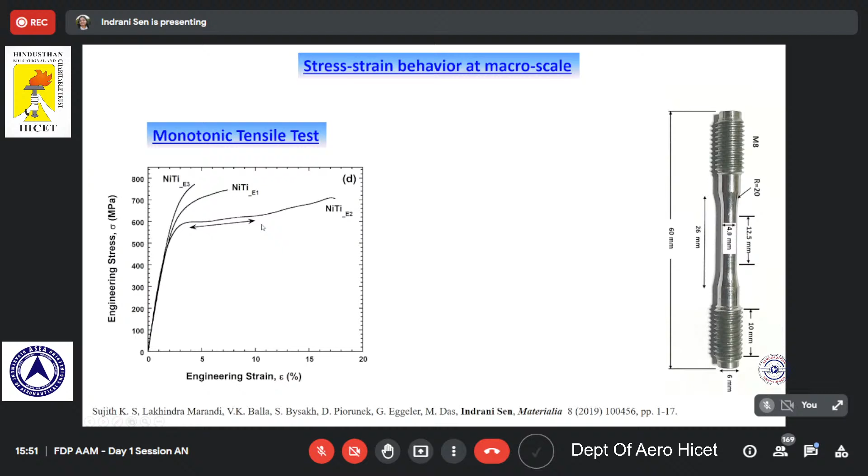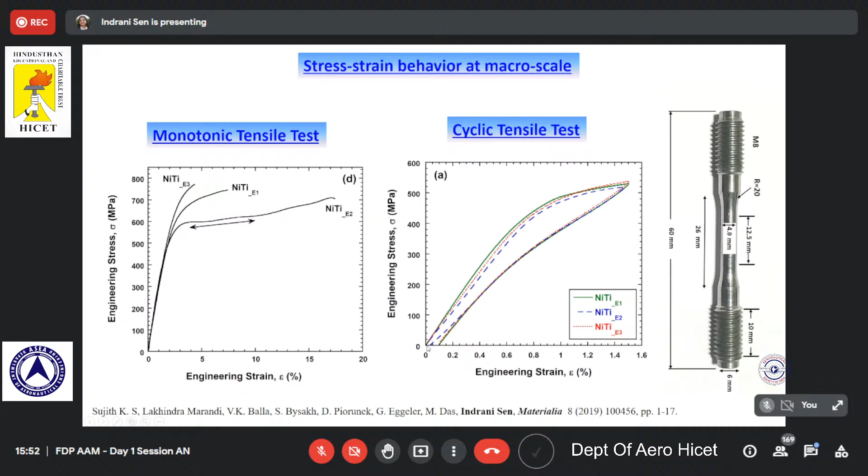So although we started with the same alloy system, the same powder, we can see that just by varying the laser energy densities for the operations, we end up with different microstructures, different phases, and different properties—mechanical properties, and particularly pseudoelastic properties. Especially for aerospace applications, additive manufacturing is often used for making complicated shapes. Nickel titanium being very expensive, we want to reduce material wastage, and additive manufacturing is very promising for that.

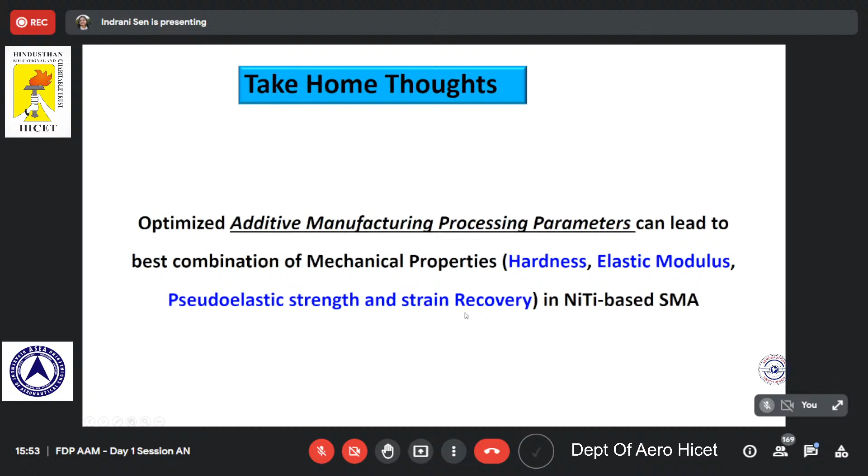But we need to use the optimized parameters of additive manufacturing to get the best combination of mechanical properties. With this, let us conclude the presentation here.

I'd like to acknowledge my group of students who helped me with all the experimental work, and my collaborators from across the globe who helped me establish this. I'd be very happy to answer your questions.

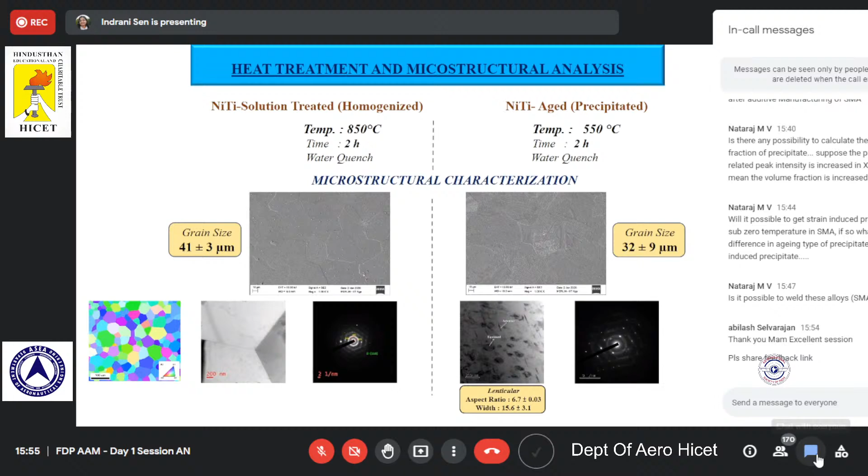How does HCP crystal plane convert to FCC in XRD? HCP is not converting to FCC in XRD. XRD is a measure by which we can find out the crystal structure of any material. Nothing converts in XRD. In this case, for nickel titanium, it is a cubic structure that converts to monoclinic. There is no HCP or FCC here.

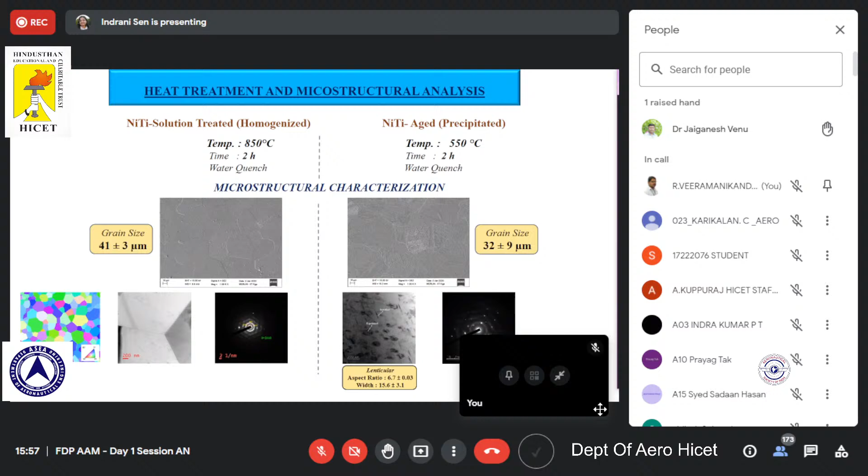In general, titanium has an HCP crystal structure, so it's a four-plane. Nickel is the austenite FCC crystal structure. So my question is, if it's an HCP crystal structure, how can it be transformed from a four-plane to a three-plane? Is there any conversion in XRD?

NiTi has a separate crystal structure compared to individual nickel and titanium. I see the rest of the questions are mostly from you, so please go ahead with the question.

Due to aging, precipitate formation is in good agreement, but is strain-induced precipitate possible in SMA? Strain-induced precipitate, no. Strain-induced phase transformation can form, but strain cannot form a precipitate as such. Due to the formation of precipitate, there could be some strain, but strain itself is not supposed to form a precipitate. For precipitate formation, you need a compositional disbalance and need to do something with heat treatment.

Okay, the combination of twinning and martensite is a known concept, precipitate and martensite combination. Precipitate and martensite combination, I'm not getting your question, Mr. Nataraj.

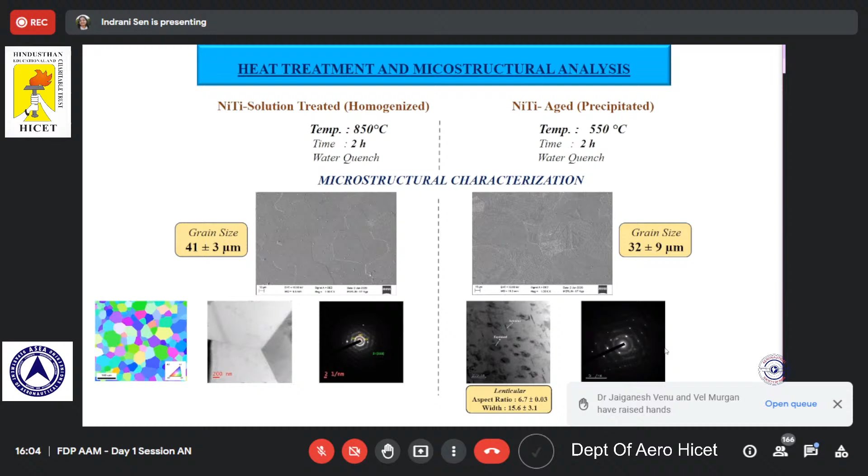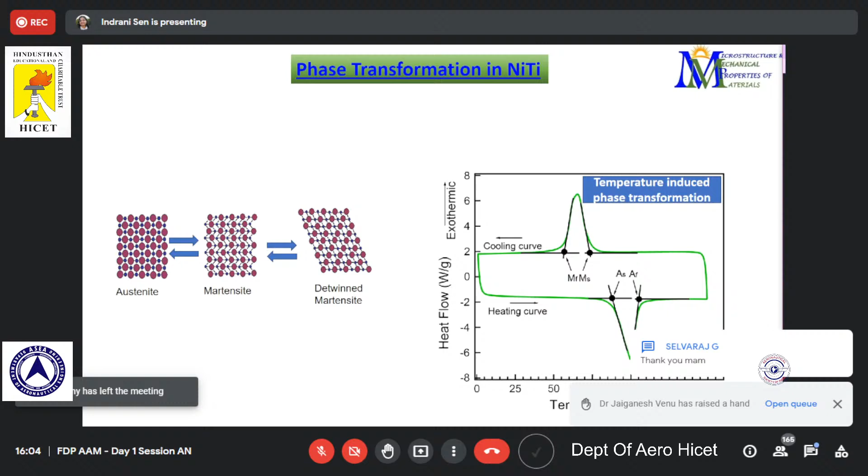Is it possible to weld these alloys? Of course, of course. So when it is used as a stent... There is one concept, strain-induced martensite, that everyone knows. Even strain-induced precipitation is also possible, as people are talking about. Ma'am, in that context, in nickel-based alloys, there is one paper on surface modification techniques. They also mentioned very clearly using strain as well as temperature.

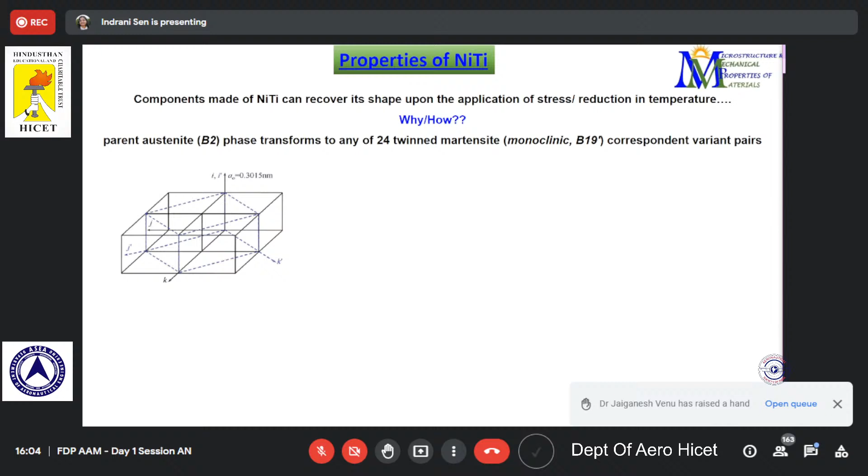Of course, they used a higher temperature. Yes, that's what I'm telling you. You have to apply the temperature, otherwise it is difficult for the precipitates to form. That's the point. Strain is an additional source of energy. When you are doing this with temperature, only then can it form the precipitate. So for making the precipitate, temperature has to be there. It is not like you just apply strain and the precipitates will form.

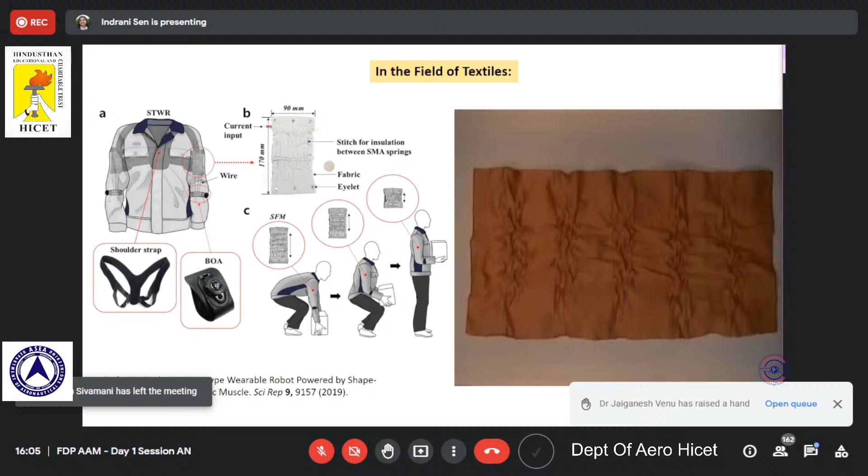Suppose the material is subjected to sub-zero temperature and I apply a very high strain rate, not 10 power 2 or 10 power 3, but 10 power 7, so in a fraction of a nanosecond. Is that possible? That is a kind of impact. Yes, ma'am. Impact always comes with adiabatic heating. There is internal heating that comes into the picture when you increase the strain at such a high rate. This is high strain rate deformation. So in that case, is it possible?

That could be. As I said, the material has to get the temperature. It does not understand whether you have placed it in a furnace or impacted it at a very high strain rate. Okay, ma'am. That's when it gets the precipitate.

Okay, regarding your welding question, this is how welding is done. All these wires are attached by welding, and that leads to the heat-affected zone and some defects due to welding, and because of this some of the properties, the shape recovery properties, are lost. So of course welding is possible, but proper measures need to be taken.

Okay, and one more question I have not added here. Can I please answer? I will request the permission of the chair to intrude here so that I can answer others also. Okay. Thank you, ma'am. You're welcome. I can see a message from Avinash Shelvarajan thanking me. So thank you, Mr. Avinash, also.